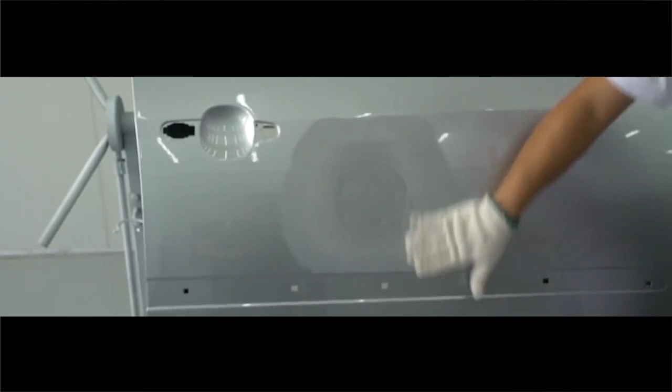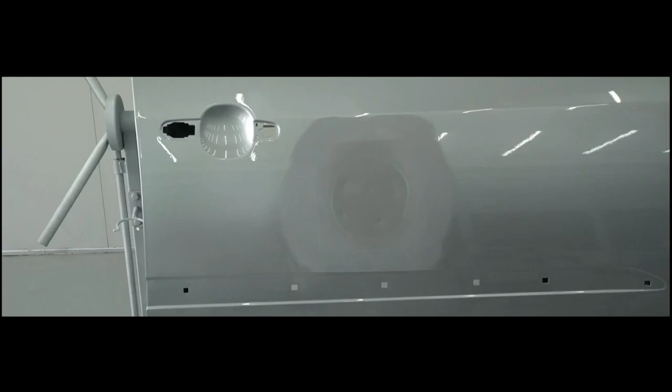First, grind the zone sprayed with epoxy primer using a scouring pad to ensure the adhesion of the scrape-coated putty. When grinding is over, clean the panel using a dust-blowing gun and evaluate the zone to be scraped with putty. In such a way, confirm the damaged zone of the panel and the amount of putty applied.

Mix the putty base and curing agent thoroughly before use. Take a certain amount of putty base and curing agent and place them on the agitation plate. Never directly squeeze the curing agent onto the putty base before you agitate the putty. Typically, blend the putty and curing agent at a weight ratio of 100 to 2 to 3. Mix the putty and curing agent thoroughly using a scraper.

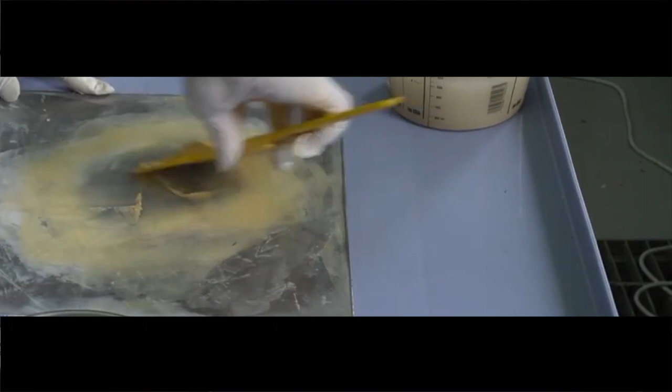Practice the procedure repeatedly to ensure that the process can be completed within 60 seconds. It is necessary to quickly mix them and apply the putty onto the surface of the workpiece. As a chemical reaction has occurred after putty mixing is started, the mixture will become unstable once it cures. Whether or not the mixture is homogeneous can be judged by the color of the mixture. Inhomogeneous mixing may result in problems like poor putty curing and poor adhesion.

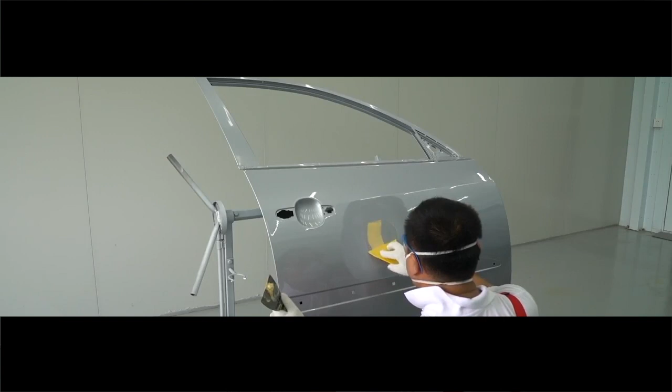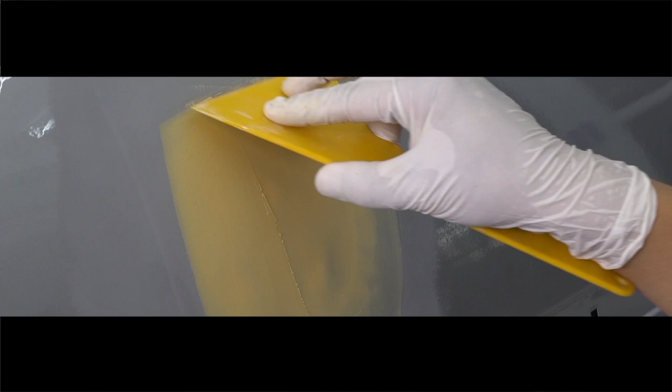First, take a small amount of putty using a scraper. Apply a thin layer to the surface of the damaged zone and forcibly press the putty into small dents resulting from welding or trimming while applying, so as to ensure good adhesion of the putty. Filling up scraping. Put the putty on the scraper and move the scraper. The edge of the scrape-coated area must be thinly coated when putty is scrape-coated.

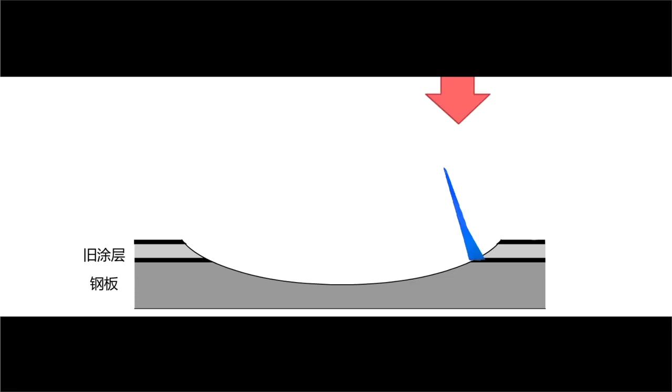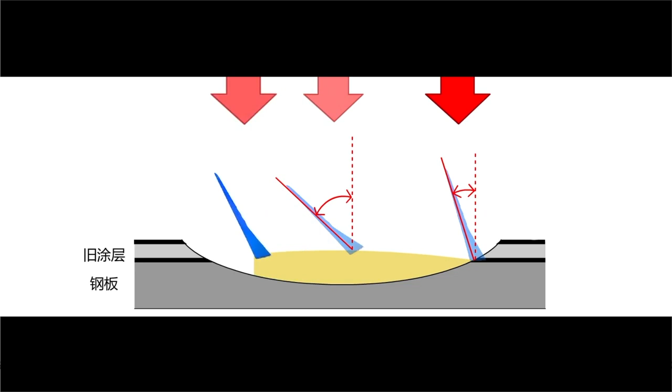To apply putty to the damaged zone, apply pressure on the scraper. Keep the scraper slightly vertical when you scrape-coat putty to the dented zone, and gradually tilt the scraper and reduce the force when the center position is reached. Once the center is passed, gradually increase the verticality of the scraper and increase the force applied onto the scraper.

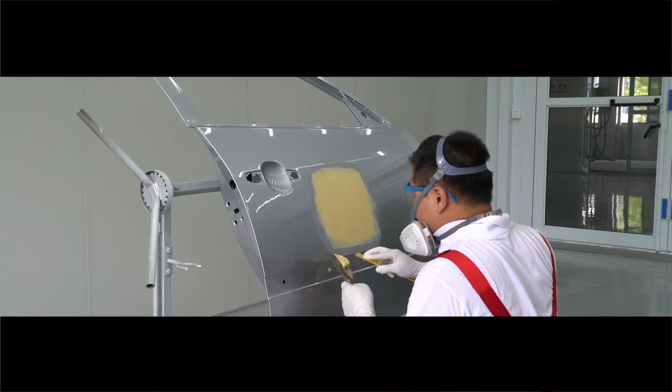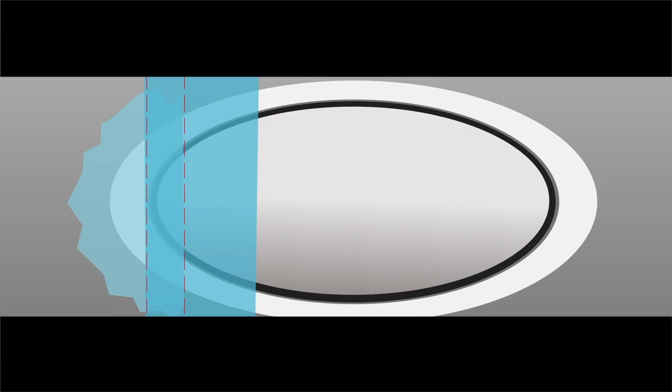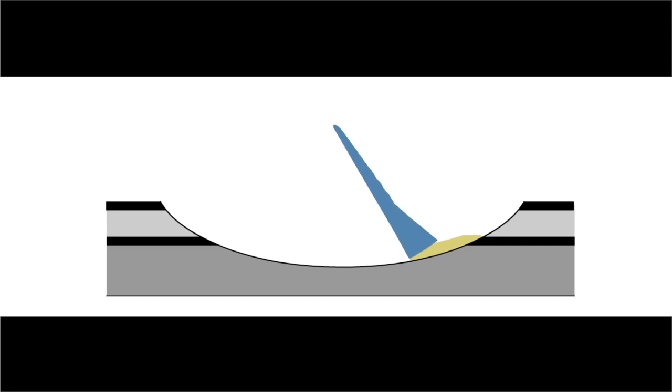Scrape-coat the concave zone, and scrape to ensure that no putty residue remains on the surface of the workpiece. Each stroke of putty needs to overlap 1/3 of the previous layer during putty scraping. Care must be taken during scraping. It is recommended that each layer be scraped thin, so as to minimize the occurrence of blisters. In case the damaged zone is big, fill up the defects with big dents before the layers are thickened progressively.

Once the surface of the first layer is dried, repeat scrape coating a second time and repeat it till sufficient filling up is achieved. The edge of the putty coating zone shall not be excessively thickened. To apply putty on a large area, scrape-coat using a wider scraper to achieve more ideal surface smoothness.

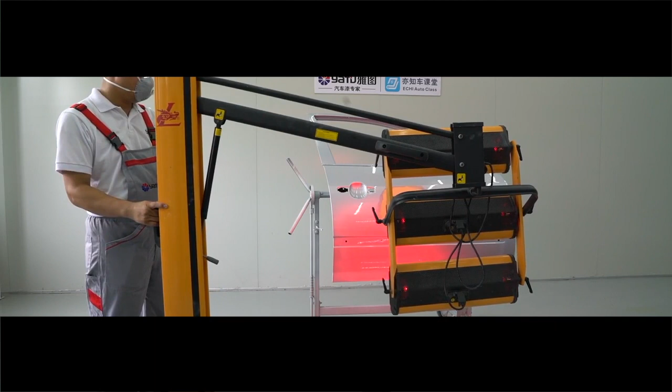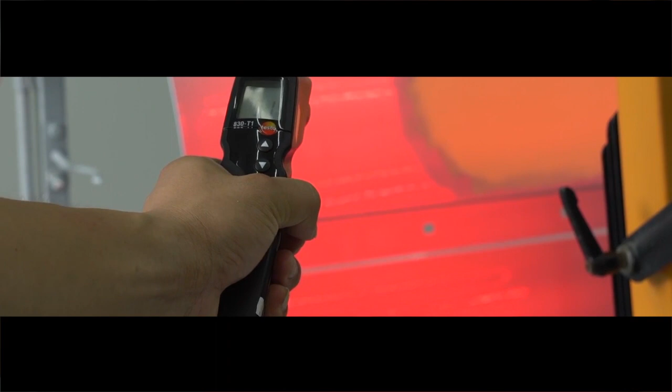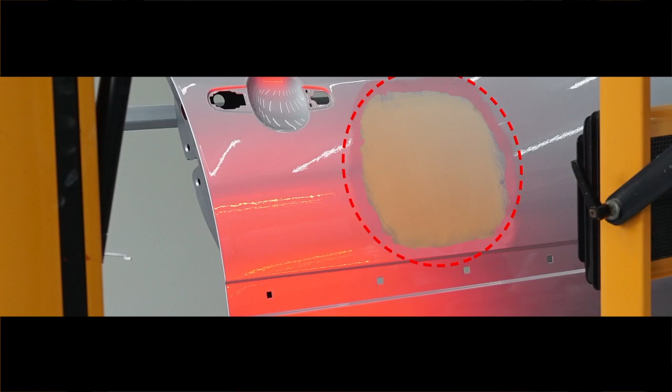To grind the surface, the putty must be dried. To accelerate the curing process, forced drying at about 50 degrees Celsius may be performed, and heating shall be stopped once the temperature of the putty exceeds 50 degrees Celsius. According to experience, once the surface is too hot to touch, the temperature is too high. The positions with a thick layer of putty take a relatively long time to dry. Therefore, you may check the putty in such positions for complete dryness.

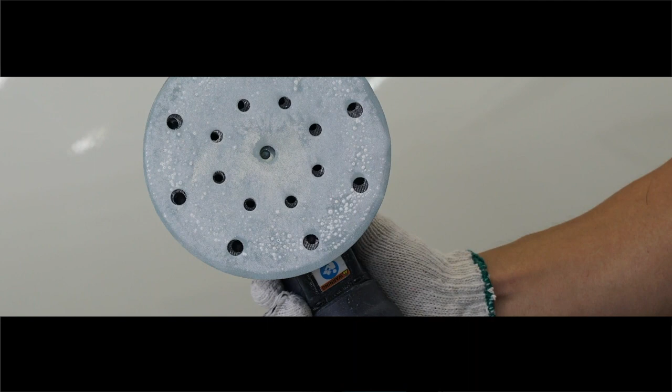Check the putty curing as follows. Test the zones where the putty is coated using a fingernail, or use sandpaper to polish the thicker parts. Putty that is not completely cured will adhere to the paper in this way in a subsequent polishing process. Never start grinding before the putty achieves dryness and curing.

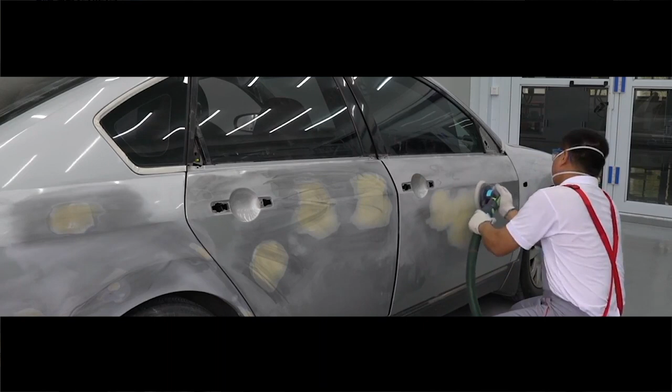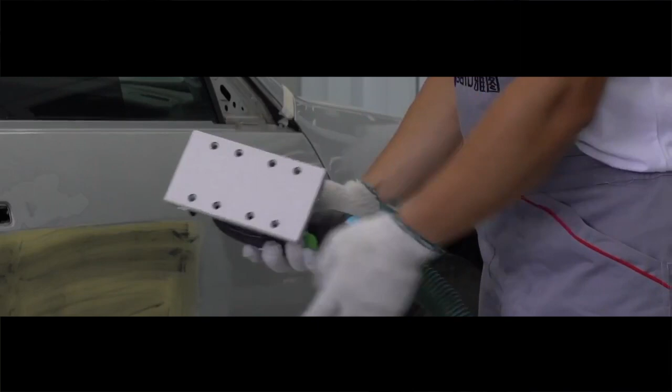During automotive coating, grinding is generally performed mechanically or manually. Putty grinding shall be performed as a dry grinding process. Manual grinding is applicable to corners that are not suitable for grinding heads, and positions that require post-sanding fine grinding and fine trimming. Mechanical grinding can reduce labor intensity, improve work efficiency, and save grinding materials. However, both manual and mechanical grinding are usually adopted to grind corners, edges, and bends so as to ensure the grinding effect.

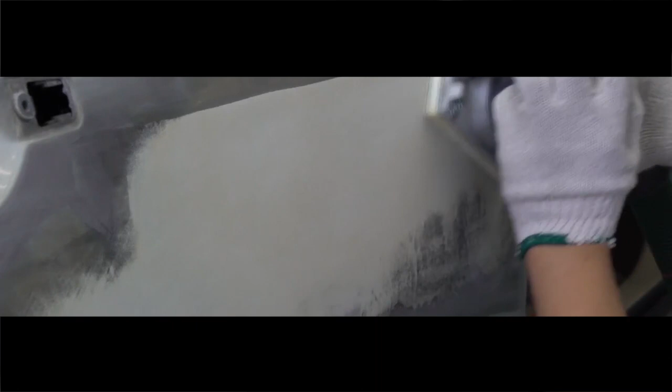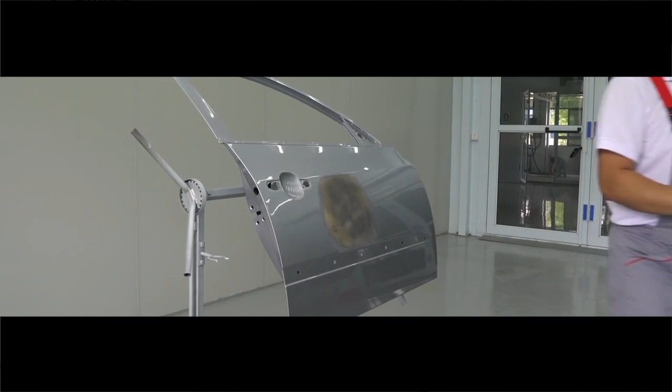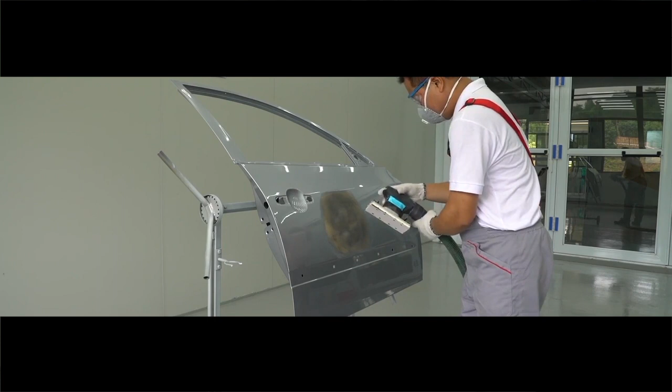First, apply a layer of grinding indicator in the putty applying zone, so that the technician can use the grinding indicator to visually check the surface for problems like irregularities, pinholes, and abrasive paper traces. Sanding indicator shall be applied every time the sanding paper is changed during subsequent grinding. Before grinding, it is advisable to consider the size of the putty scrape coating zone and the grinding method, and rationally select the type of sanding paper and the grinding head.

Perform rough grinding using a rail-type grinder fitted with sandpaper number 80. Pick up the grinder from below during grinding, and the body posture shall allow moving the grinder horizontally or vertically with ease. Hold the grinder such that it touches gently the putty surface, and allow the grinder to touch the putty before you start it up. If you start the grinder up before it touches the putty surface, it tends to scratch the latter.

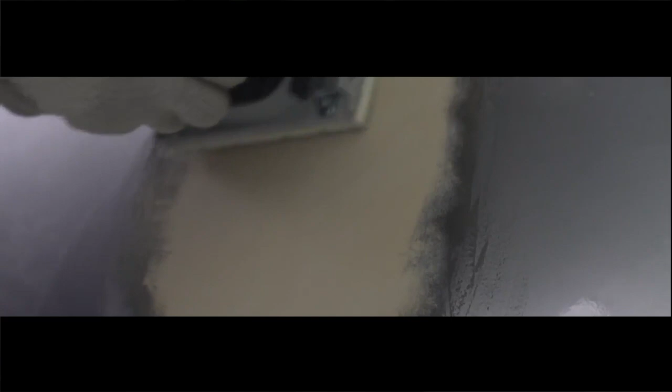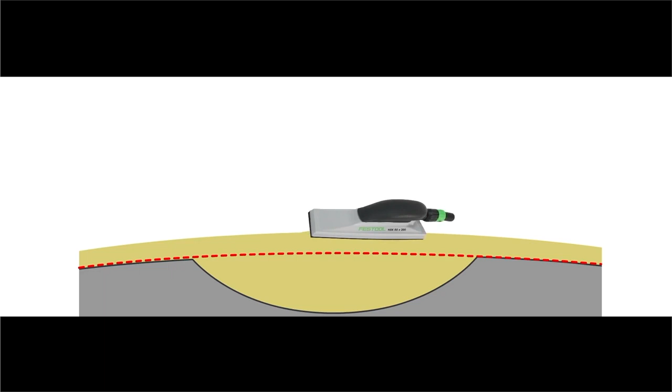Move the grinder vertically, horizontally, and slantwise during grinding to ensure that grinding is conducted within the range of the putty. If the sandpaper comes into contact with the coating, it will leave a deep trace of sanding paper, which cannot be removed. Grind the putty applying surface to avoid such a case. Check the surface by hand touch during grinding, and remove the large dents or bumps. To grind the high spots, perform local grinding on it, and then grind the entire surface to avoid surface unevenness.

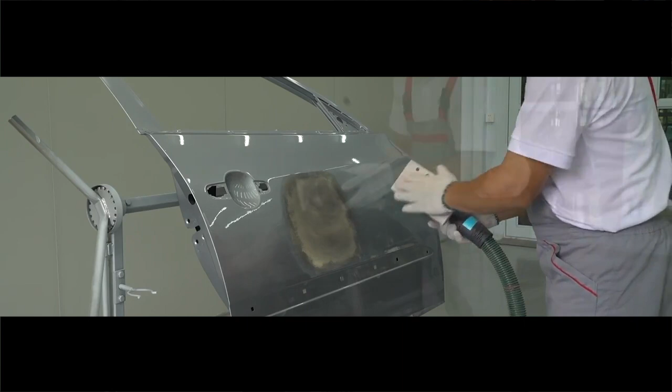Rail grinder plus P120 sanding paper. Grind the surface using a rail-type grinder fitted with number 120 sanding paper, and move the grinder crosswise in a star-shaped pattern. Care should be taken to grind the putty surface only, and avoid sanding paper traces on the old coating. Check whether the feathering edge or steel plate surface can be seen through the putty. If yes, stop grinding to avoid over-grinding the surface.

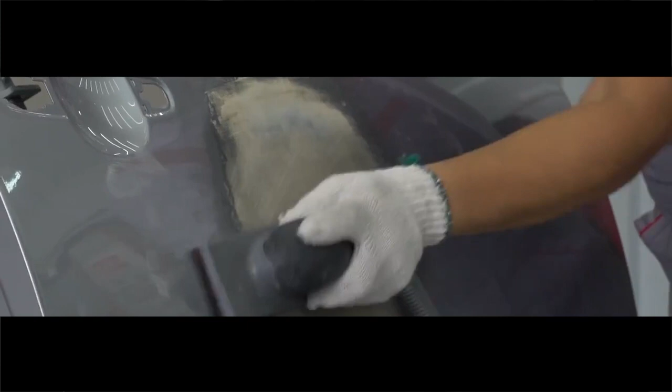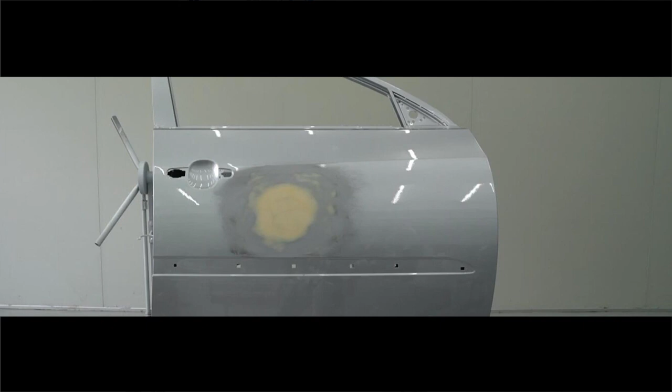Then, use an abrasive block fitted with number 180 sanding paper to polish the surface manually. Grind the entire surface of putty. Once the formed surface accounts for 80% of the undamaged surface, check the visibility of the feathering edge and continue grinding until the entire feathered edge is visible through the putty. Only one layer of putty shall be left over at the finishing feathering edge. To form the same shape as the original undamaged surface, just remove the grinding marks.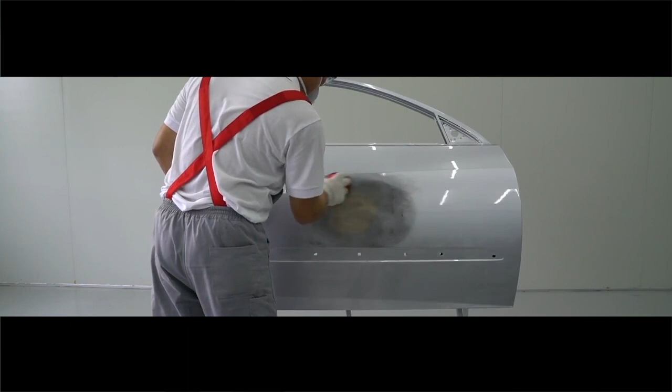Surface trimming. Surface trimming is intended to remove sanding traces left over during previous grinding, and to ensure the natural transition from putty surface to coating such that the surface is identical with the undamaged one. Use number 240 sanding paper to trim the surface and remove all traces of grinding to ensure the natural transition of the putty to the coating. Eliminate all sanding paper traces between the coating and the putty.

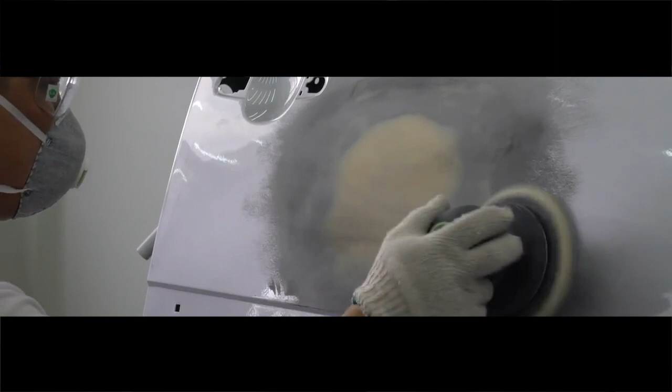Grind the surface to 20 millimeters of the surface molding part and carefully check the surface shape and the transition from putty to the coating using the palm. Upon completion of the surface trimming, a thin layer of atomic ash shall be left over.

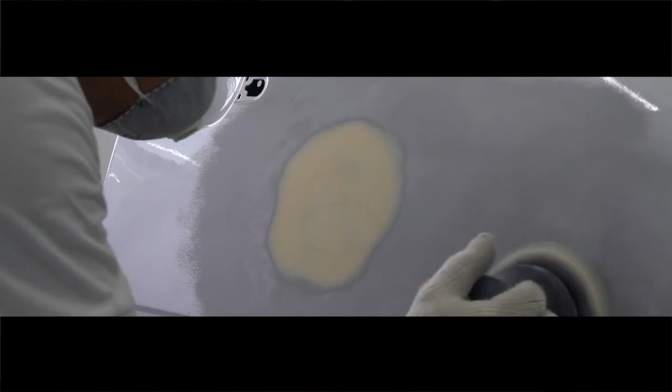For application on the ground surface of midway primer, use number 320 sanding paper to remove the sanding paper traces left over during previous grinding. The grinding range is about 10 centimeters at the edge of the putty. If the grinding area has a body shape or a panel edge, you may stop grinding to reduce the grinding zone. Eliminate all sanding paper traces left over by intermediate steps and ensure that the surface gets dull. If it still has luster, it means that the grinding is not enough. Otherwise, the subsequent coating may peel off.

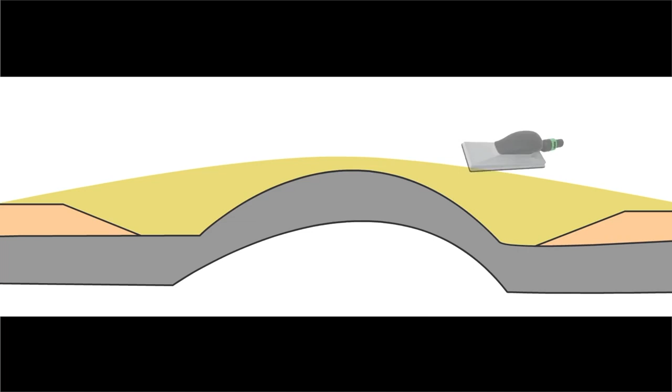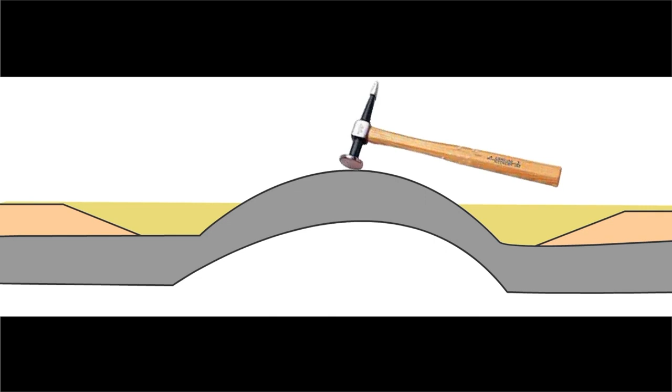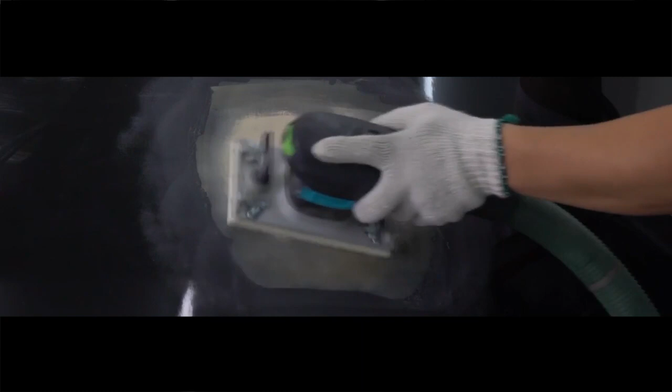In the process of putty grinding, stop grinding once the points above the undamaged part are exposed. Knock down the high points such that they are lower than the undamaged surface. Then apply a layer of putty across the whole surface. If it is found at the time of grinding that there are some parts inadequately filled with putty, it will not be able to form the correct shape. Thus, stop grinding the surface and clean the steel panel. Apply putty in the concave zone, and then apply a layer of putty on the whole surface.

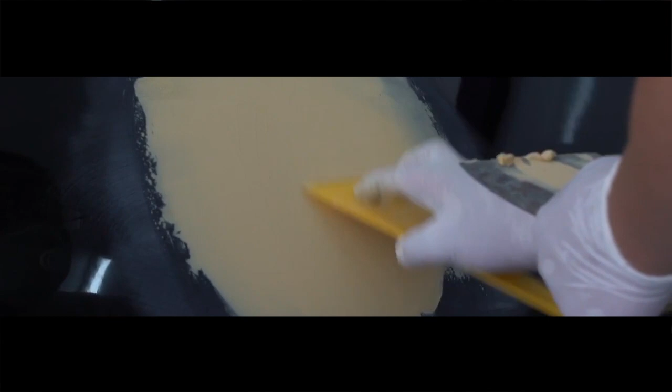If it is found that there are pinholes that cannot be filled up in subsequent procedures after the grinding of putty, the pinholes shall be filled up and a thin layer of putty shall be applied to the whole surface. Notice that the formed shape of the surface may be changed, too, if much putty is applied when the pinholes are filled up.

Post-grinding check. After grinding, remove all sanding paper traces left over during surface trimming, so as to ensure the surface is flat and free of sag, bulge, and pinholes. Clean the surface and go to the next step.